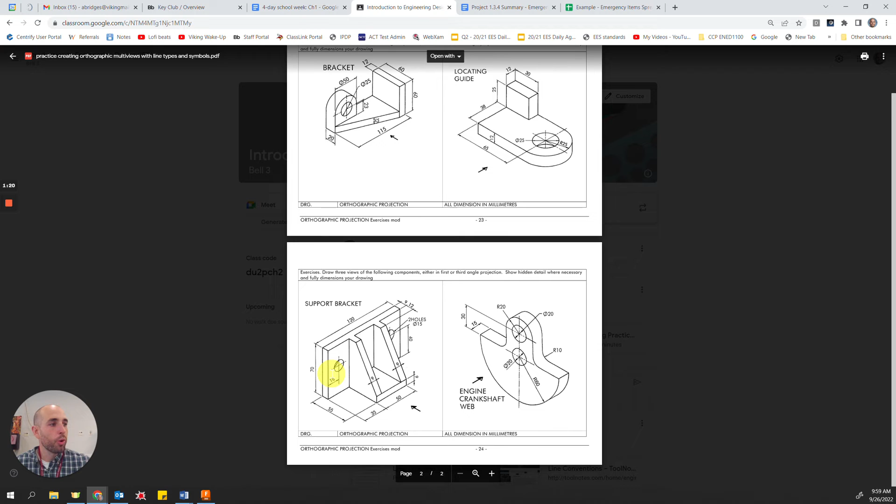So with that being said, let's go ahead and work on this part right here. What is this called? I don't even remember. Let me flip over here and see. This is the support bracket, and we're going to zoom in on that one. I'm going to go through in reverse and show you how I got to this point right here. I'm just going to walk you back through my timeline. It's great to have this feature here. So I'm going to roll this thing back, and I'm going to show you after this first sketch.

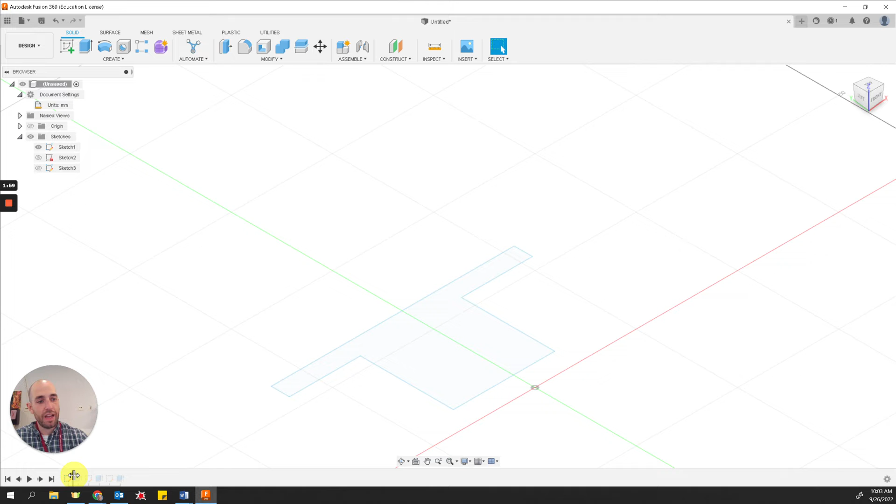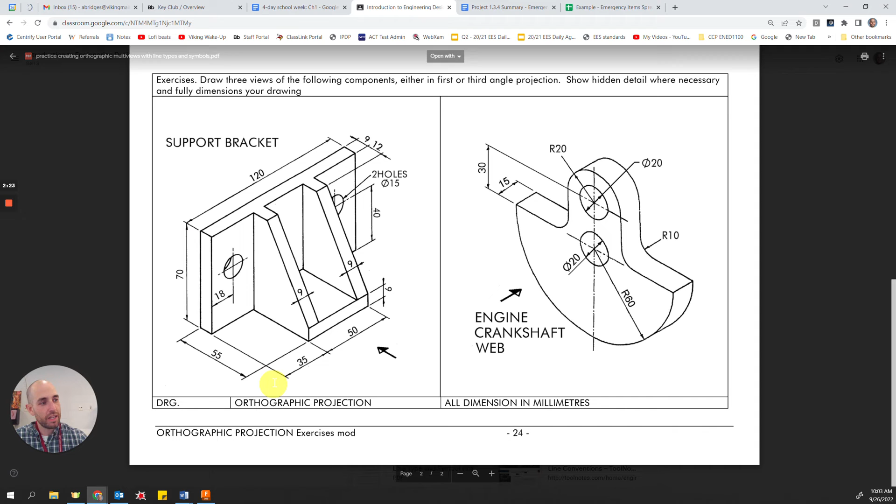All right, so once you've extruded a sketch or done something to it, by default, Fusion turns it off. So over here in my sketches folder, I'm going to expand that and show you this is what my sketch looked like. Okay, and that was the top of the item. Then I extruded it up to give the general shape. Now you notice there's a cutout here in the middle, and I'm going to add that in later, but to get the general solid shape, I sketched it from the top, 120 by 9, and then I came in from these edges, looks like a distance of 35, to create that little bottom of the T. And we can show those dimensions by going into this sketch and editing it.

Okay, so once you get that sketch done and you extrude that shape up a distance of, looks like 70, then we can start applying some other extrusions to it. I sketched this second sketch right there on the back side. I should have sketched right here on this plane, but I was looking at it from the other side at the time. It's the same, it doesn't matter. So I'll move forward in time.

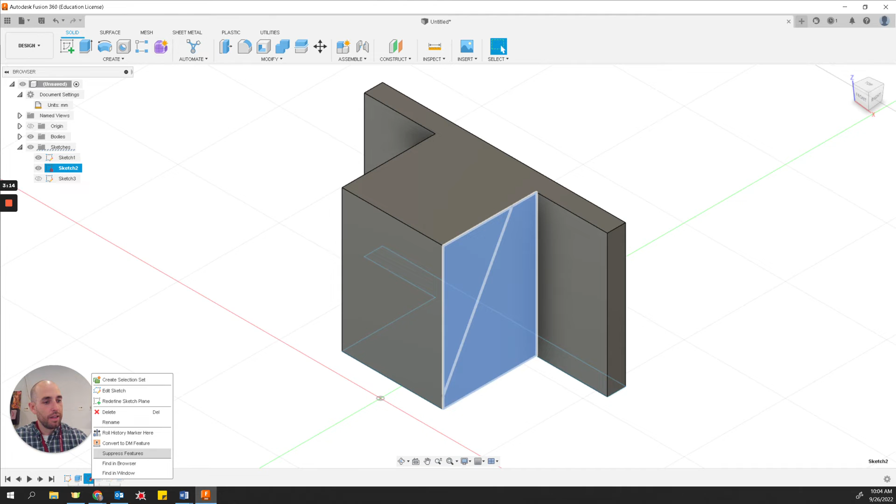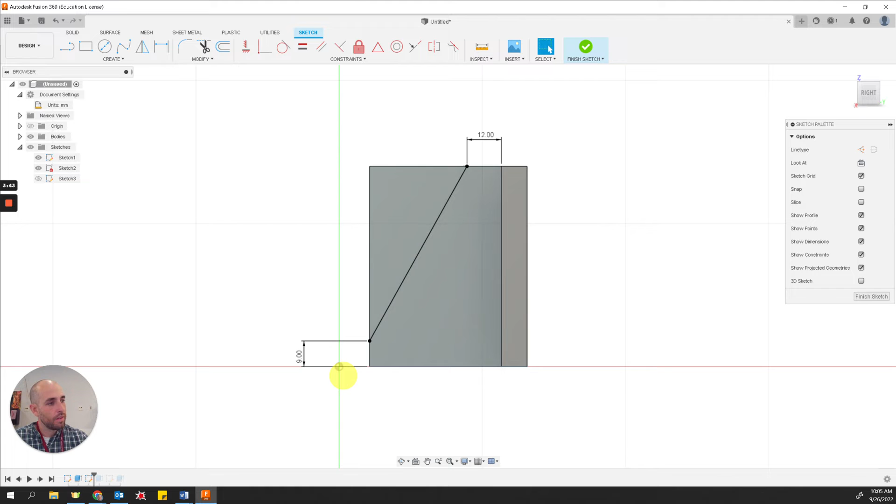Once I sketched the triangle there, it looks like it's 9 up from the bottom and 12 in from the wall. Ooh, I got the wrong one there. Is that a 6 or is that a 9? I think that's a 9. And I put in a 6, so I need to change mine to a 9. That looks a little bit better. When I finish the sketch, then we want to do an extrude on this region, but instead of a join, we're going to make it a cut. So when you go forward, there is our feature. We did an extrude cut going that way, and it cut that off.

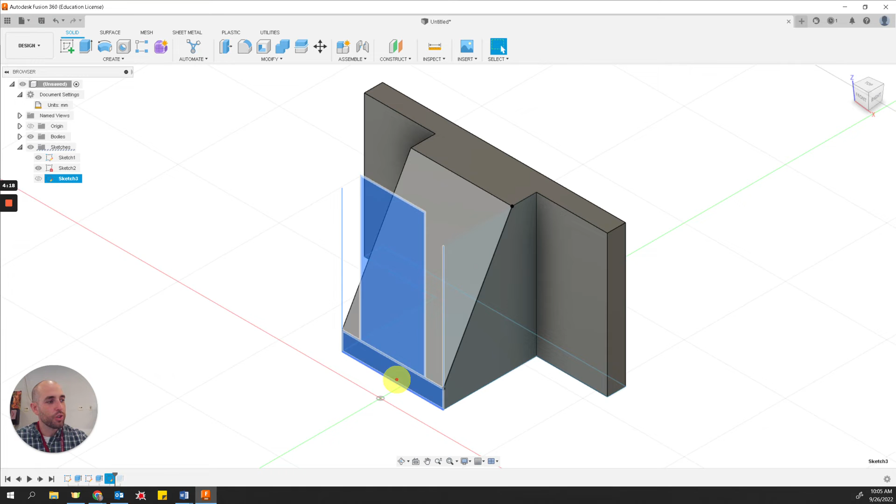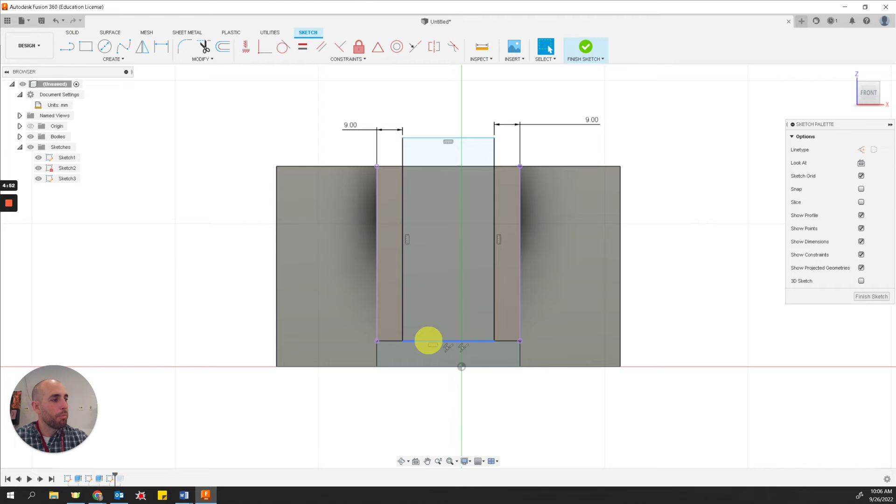So the next thing I did was I sketched on this front face, and that is going to be the empty hollow space that goes into the part. Let me change my view back to the home view. I sketched this rectangle, and matter of fact, I'm just going to re-sketch it with you. To sketch that rectangle, you want it to line up with this bottom right here. So let me back up my timeline. I'm actually going to delete it, and I'm going to sketch it with you guys. So I created a sketch on this front face.

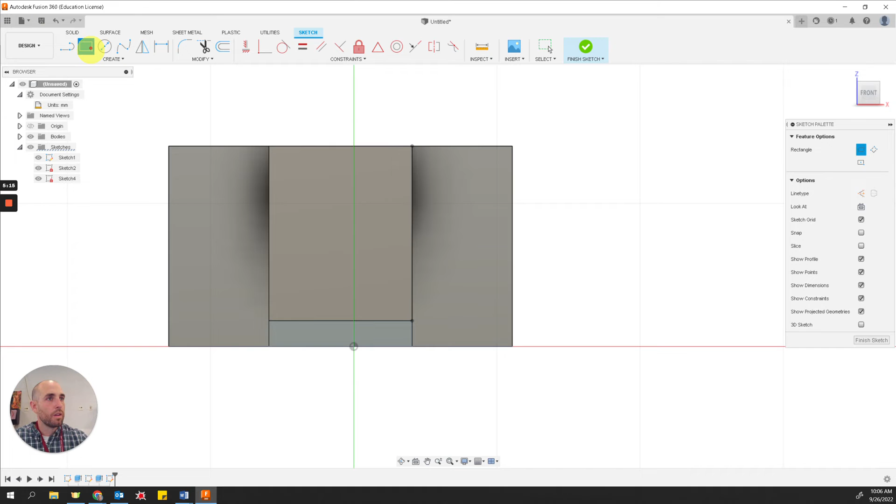And I'm making a rectangle just about like this. Now I need to apply some dimensions to it. So I know that the thickness that I want to leave on each one of these little walls right here is 9. And I want it to go all the way up against the bottom of that floor right there, which is 9 up from the bottom. I've already made that. I've already got that little corner right there.

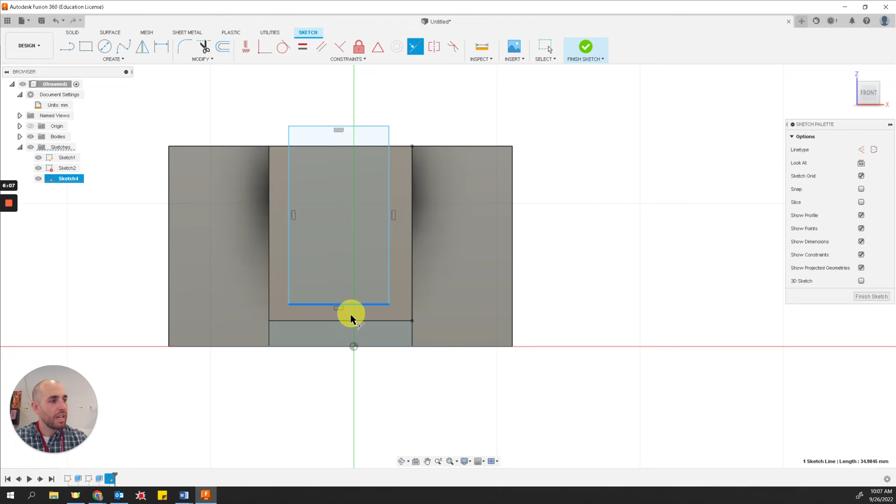So I want this blue line that I'm on to be coinciding with this black line right here. That's called collinear. Okay? So I'm going to use my constraints up here, my sketch constraints. I'm going to make collinear. So I click that. I'm going to make this on the same line as that. And look at that, it snaps it down there and makes them on the same line.

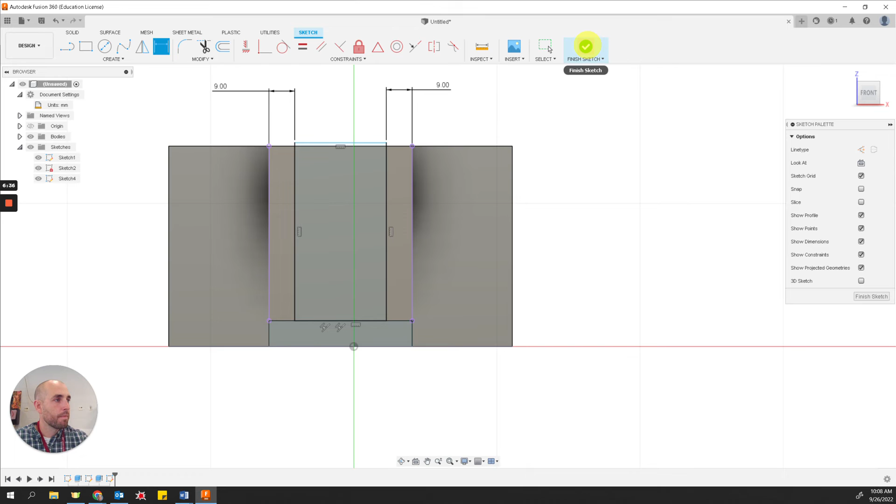That's great. Now it's a simple matter of using this sketch dimension to make that wall thickness of 9 and make this wall thickness of 9. And there we go. There's our sketch.

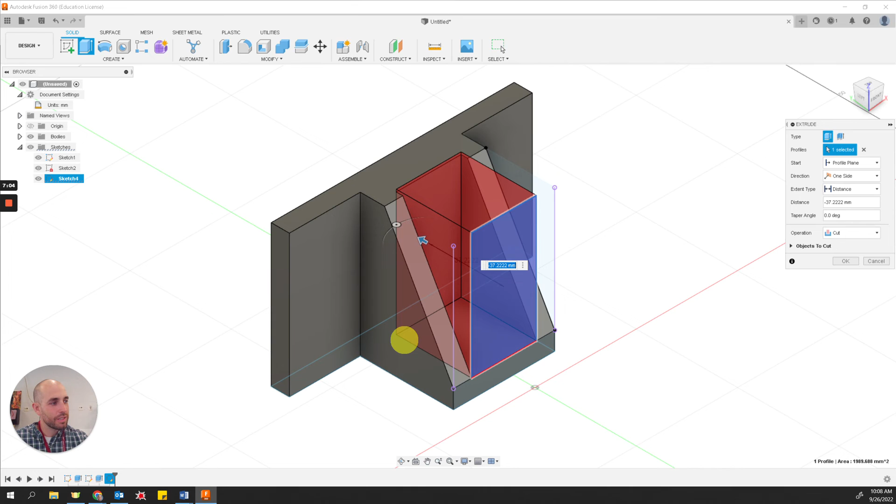Now, this might seem confusing to you, but what we're going to do here, remember, is we're going to extrude this rectangular region, not out as a join, but we're going to extrude in as a cut. Okay? And you can see it cuts away that material until it's even with this back wall. Well, right now we are extruding it by a distance. You see that distance changing? If we knew that distance, which we might, no, we don't know that distance right there.

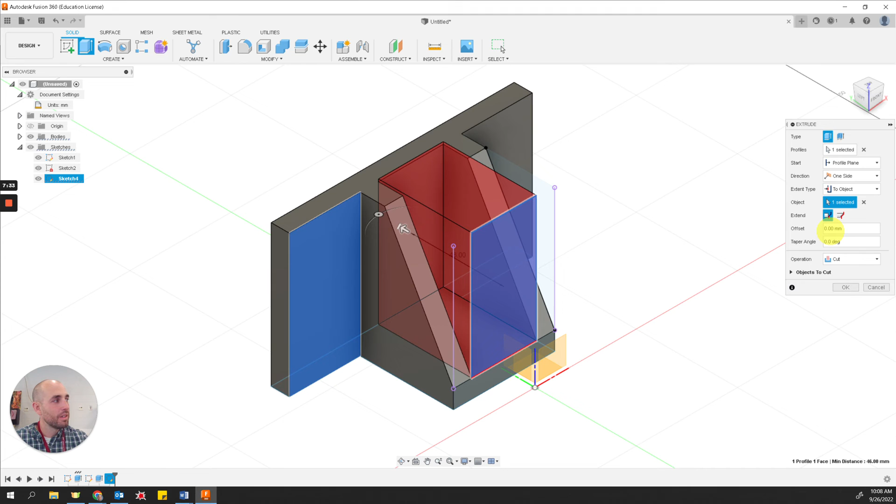Well, no worries, because we can actually change this extent type. And instead of extruding for a distance, we can actually extrude to object. And this says it extrudes to a body, face, or plane that you select. So we're actually going to extrude up to be even with this face. So I'll click that face, and it goes in that distance and stops. And we can say, okay, and yes, that is a cut operation.

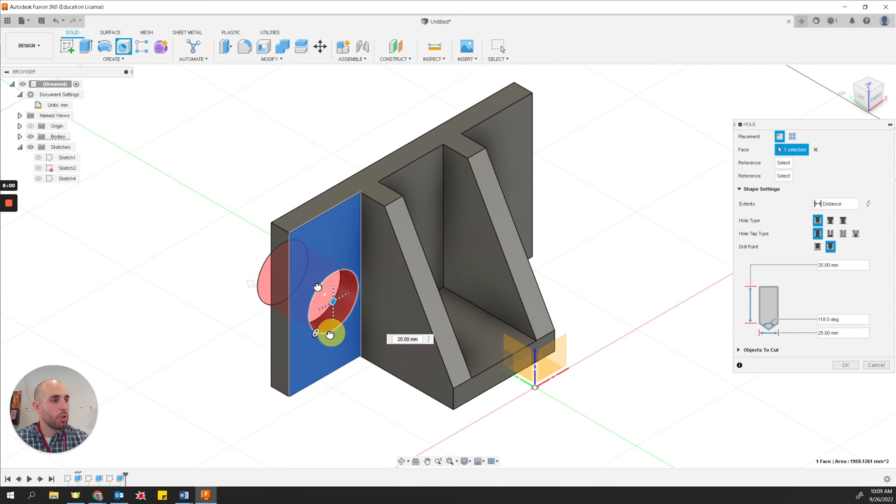So there we go. Now, you can still see some of my sketches are turned on that I've already used. I'm going to go ahead and turn those back off. Now we're at a point where we just want to put the holes in there. Now, if you choose to use the hole feature right now, that's fine, but it does not allow you to create a very precise hole. We have to just kind of guess on the location. So I don't want to use the hole feature just yet.

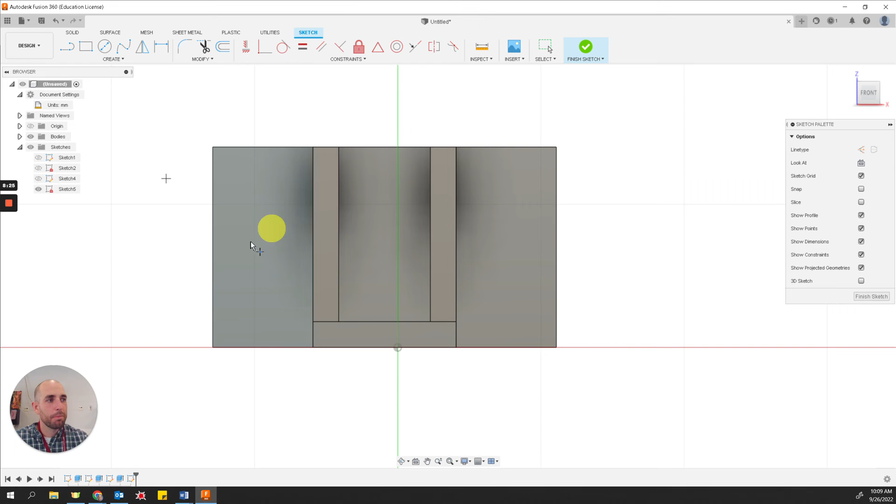Before I use the hole feature, I actually want to go in and create a sketch on this surface plane. And I want to put some precise locations for my holes to go. So to do that, I'm going to go to Create, and I'm going to choose Point. And I'm going to put one point just over here and one point just over here somewhere randomly. Now I want to dimension where they go.

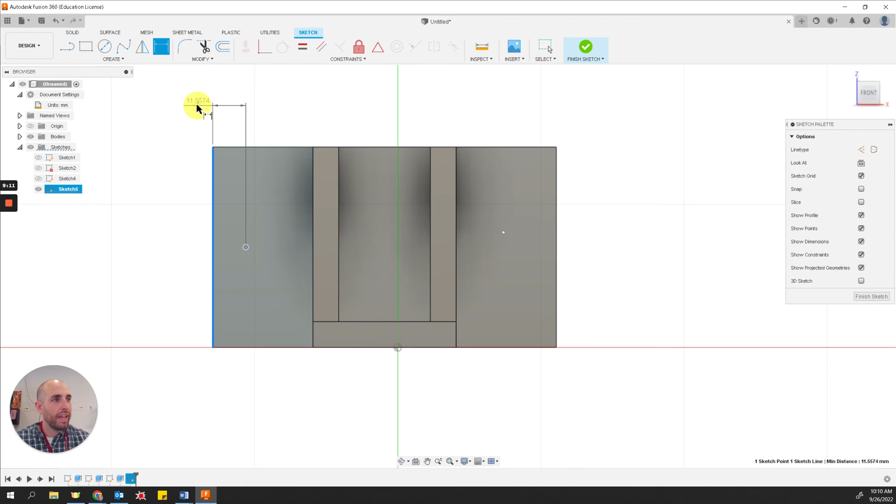So let's go ahead and dimension that right here. Dimension in from the edge, 18. Dimension in from the outer edge, 18 over here too. And then finally, dimension up from the bottom, we said 40, didn't we? Now I dimensioned that one up from the bottom. I could do the same over here.

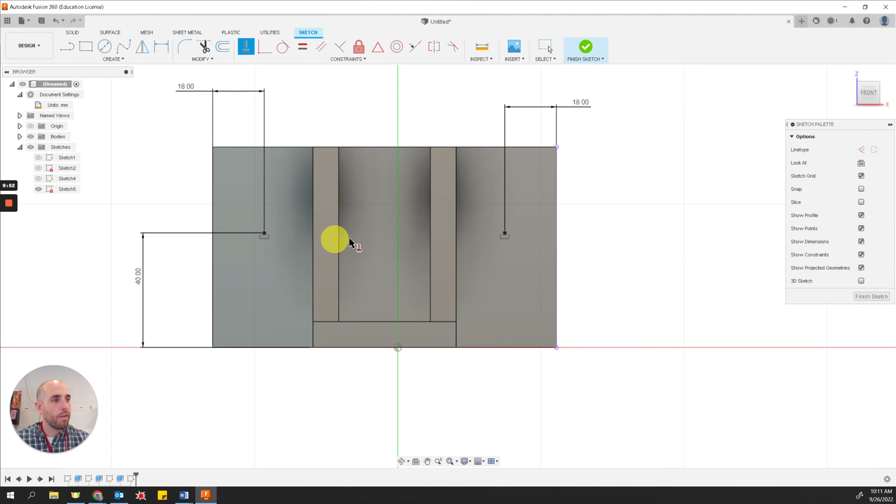Or it's time for me to show you a new constraint. This horizontal vertical. If we want 2 things to be horizontal from each other, which we do, let's choose horizontal vertical and choose point 1 and point 2. And it puts them horizontal from each other. It makes them go straight across from one another because this one's at 40 up from the bottom. Now so is this one. And we can go ahead and dimension that just to be sure.

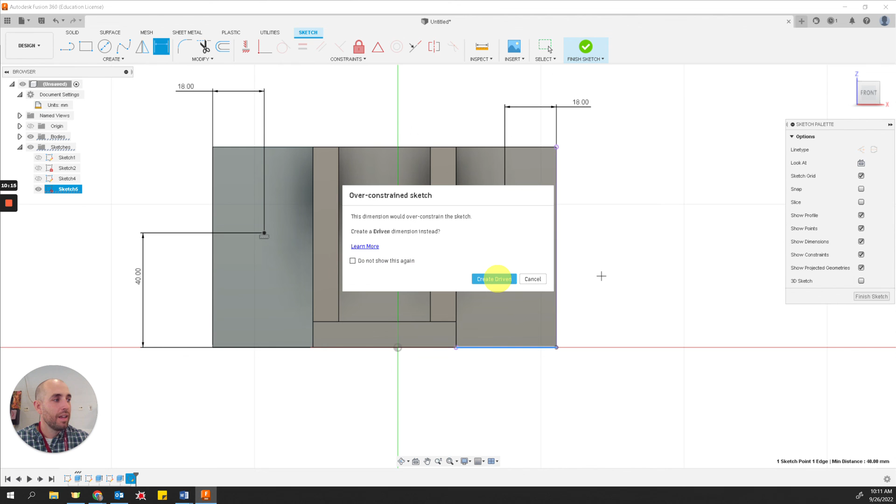So using the dimension tool, it now says, hey, your sketch is over constrained. Basically, in one way or another, we've already told it that that distance should be 40. If I click create driven, it's like, hey, I have this as 40. And we're like, yep, that sounds good. So we could also click cancel there. It's fine because it's all good. We already set that to 40 through other means. So we'll say finish sketch.

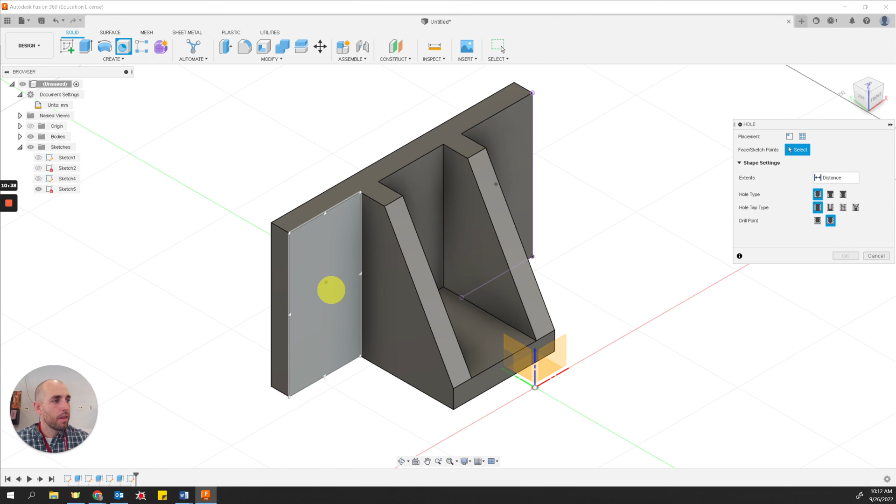Now we've got a point for those holes. So now when we go to hole, we can choose this point, and I'm going to move my view cube, and this point. So we're putting 2 holes in. Now those look a little too big. So what should my diameter be? Well, my diameter for both holes should be diameter of 15. So we'll come back over here and we'll change the diameter, which is this arrow right here, from side to side, to be 15.

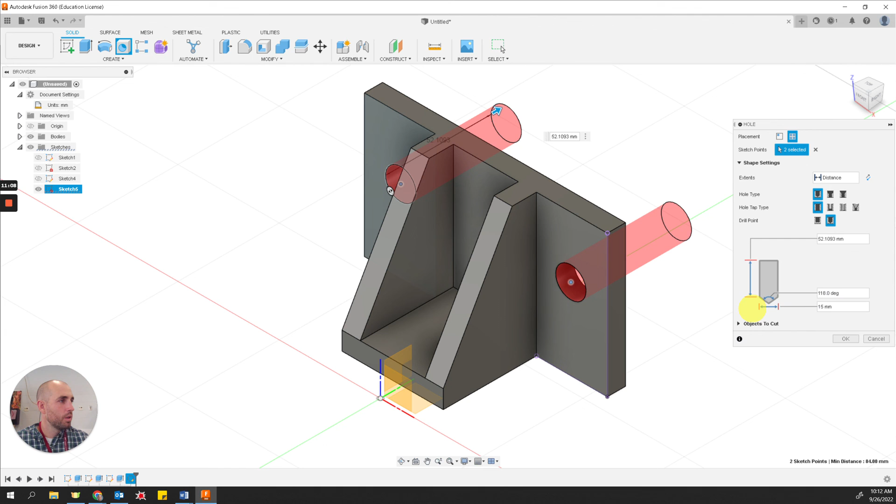And yes, it cuts through. It doesn't matter the distance because we're cutting through. Okay, as long as it gets through that little 9mm thick wall, then it doesn't matter how far you go. We'll say OK. And that, ladies and gentlemen, I believe is the part.